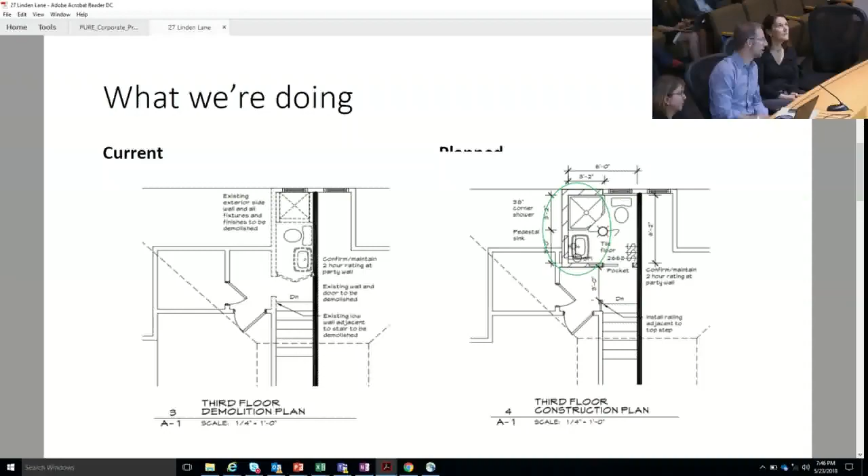What we're doing, as described, the third floor rear dormer is currently about 5 feet wide. It has a non-complying bathroom today that is unusable, a little bit crazy. You have to step over the toilet to enter a shower that doesn't work. That is pre-existing. What we'd like to do is bump the dormer out about 5 feet in order to make enough space to accommodate a shower, a toilet, and a sink on that third floor.

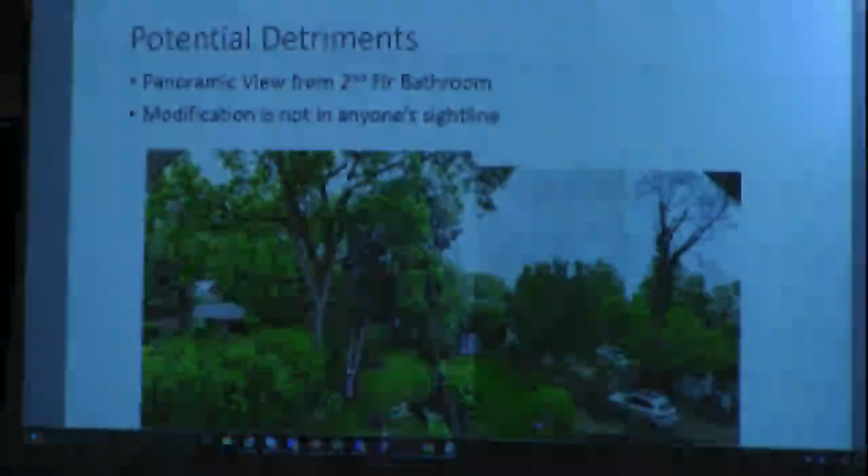There's nobody who sees this space. There's no house that looks at it, not even a back window. So cosmetically, the only person who's going to see that is someone pulling their car in and out of that yellow garage.

So we don't feel like it detracts from the character of the neighborhood or the town. We sent out the required notices. Karen Loomis is our next door neighbor in the duplex, so she's the one most affected by this. I've got the letter here - she's on her way to or in Ireland right now, but she's very aware of what we're doing and supportive of it, as you can see in the letter. I'm happy to provide a copy to anyone who needs it.

In terms of why: it gets rid of kind of a mess of a space. There's nobody using that shower right now. I have 3 teen and 20-something daughters, and let's just say that shower space in this house is at a premium, especially when all the girls are home. So it would make life a lot easier for our family. I'd think other families would benefit too, as young kids grow up to be older kids - having a second bathroom in the house is a big help.

So with that, I appreciate your consideration and would be happy to answer any questions. Mr. Harmon, can you give those slides to the board secretary? We'll call it your Exhibit A1.

Did you say you're in a duplex? It is a duplex, I refer to it as a duplex - it's attached. I don't know whether it's technically a duplex or an attached unit. The lot line runs right down the middle of the house - that's the reason for all the variances. There's a setback required even though the lot line goes right through the center of the house, and that's one of the reasons there's a problem. But it's not an insuperable problem.

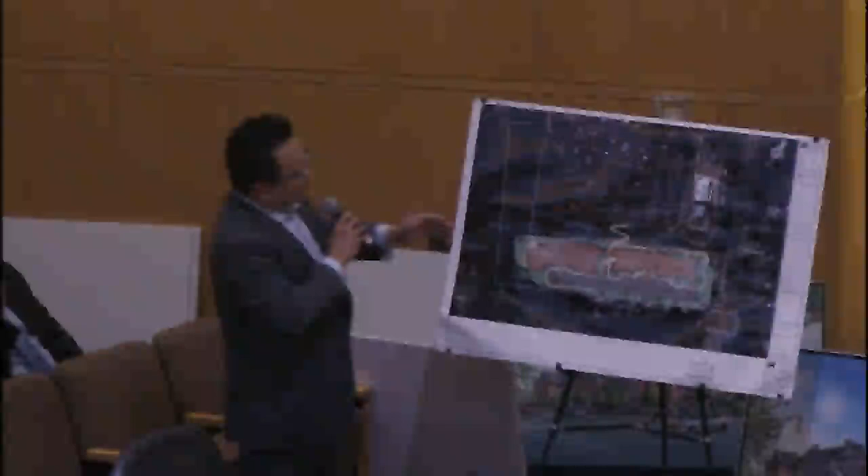Additionally, the setback here against Harrison has been pushed further away, so now the building face is actually parallel to the bank pad. The setback is approximately 58 feet from the property line. Beyond the property line is the right-of-way, which includes the sidewalk as well as curb and such, which is about an extra 10 to 15 feet or so before you get to the road.

So this plan dramatically, or significantly, increases the setback to Harrison and also reduces the height of the building. Furthermore, what's happened here is that we flipped things around a bit, so the parking is in the front in this particular layout. There are different views on whether that's appropriate, having parking in front versus in back. However, a significant benefit is that it creates a much greater separation and allows the building to be set back further from the road, reducing the overall presence.

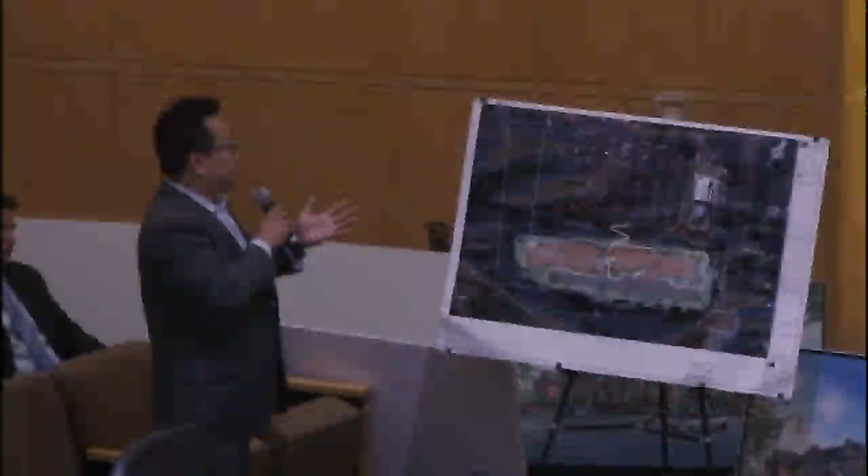So between this option here on board A9 versus the two-story version of the original proposal on board A8, we spent about an hour and a half, almost two hours, with some of the neighbors discussing the pros and cons. Ultimately it was pretty much a unanimous view that they liked what they were seeing here on A9 in terms of the trade-offs.

So what we did is take that feedback on the aspects of the design the public enjoyed and was supportive of, and went back to figure out how we could improve things even further. So what we have to show you next is our attempt to improve this. This is now the new proposed building, and we're going to show you other aspects of it.

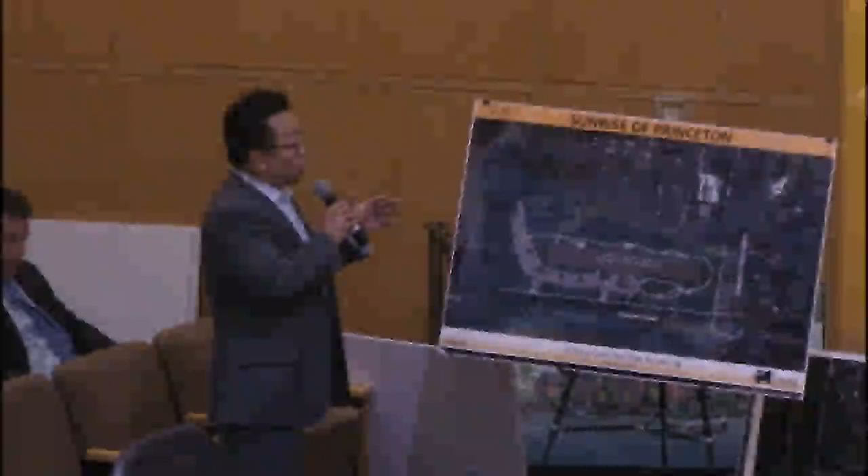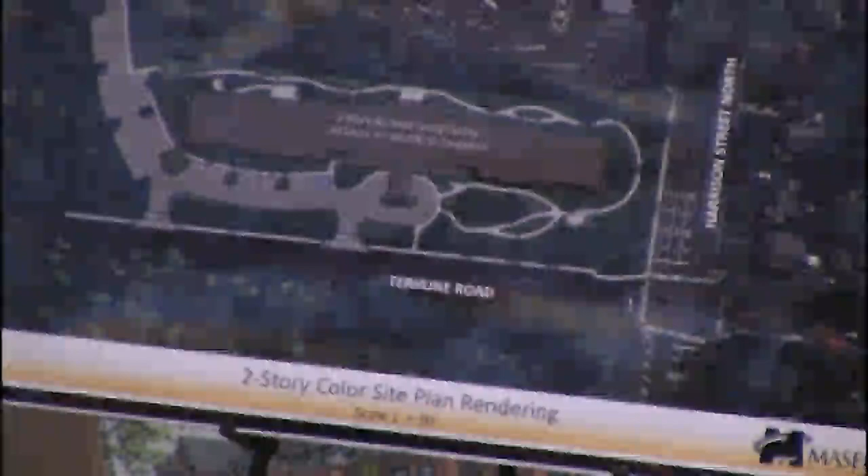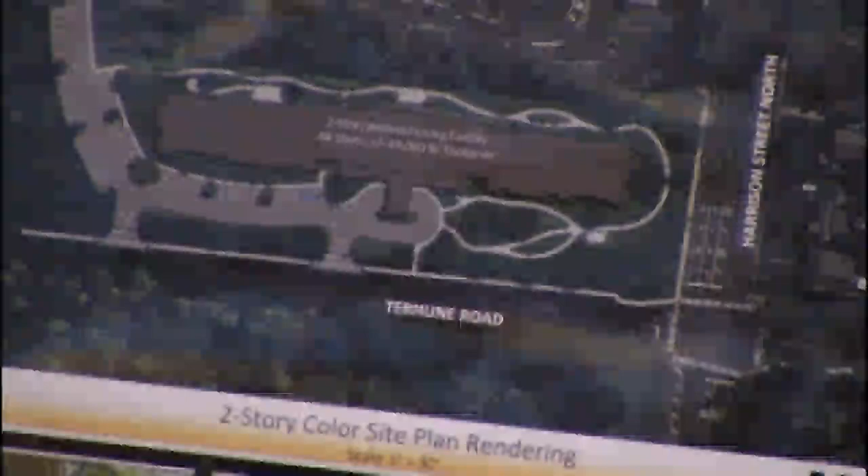So this is Exhibit A10, the new proposed building. Again, this is a bifurcated application, so we're ultimately seeking a zone change, but we recognize a big component of that is a proposed design that generally conforms and helps people get comfortable with the use. Part of showing you these different iterations is to stress that Sunrise is flexible in responding to concerns, and until we get to final site plan approval, things like exact design remain open to further suggestion and evolution.

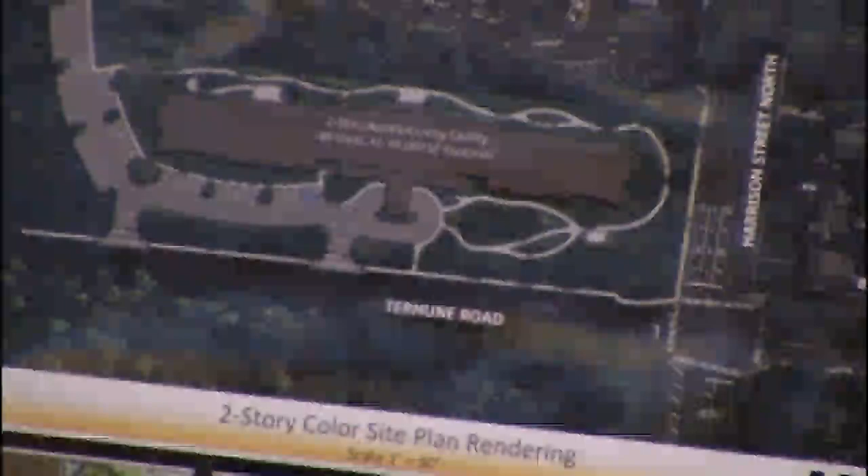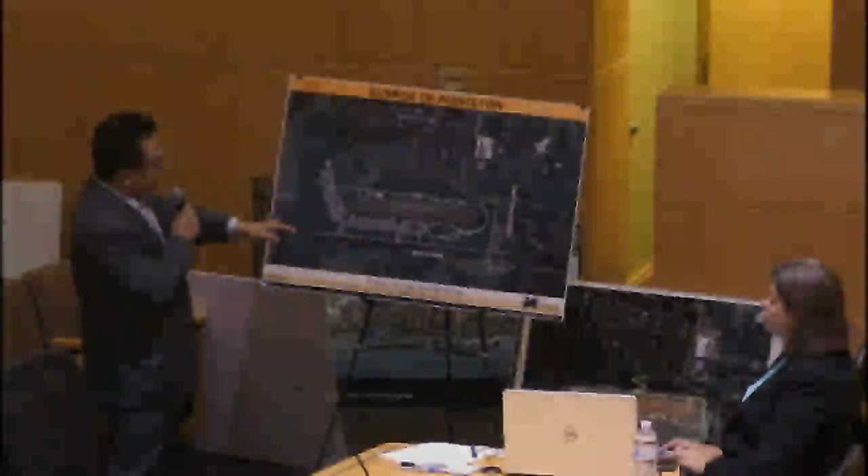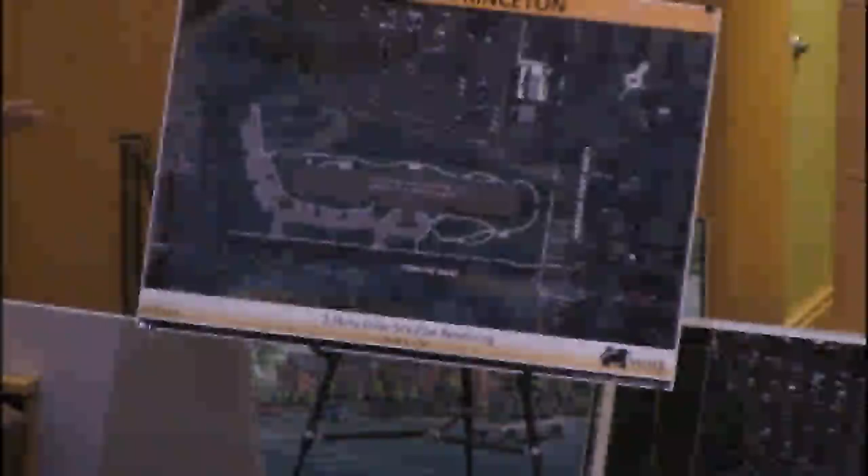I'll touch on a couple things that happened here and why I think this is actually a very reasonable and perhaps desirable plan overall. What we've done is taken the previous plan shown on A9, and rather than split it into two separate buildings, we consolidated it into one. We extended the second floor all the way through. A chief reason is that the physical layout of the site works better for additional parking by merging the building together, allowing us to curve it around to the rear.

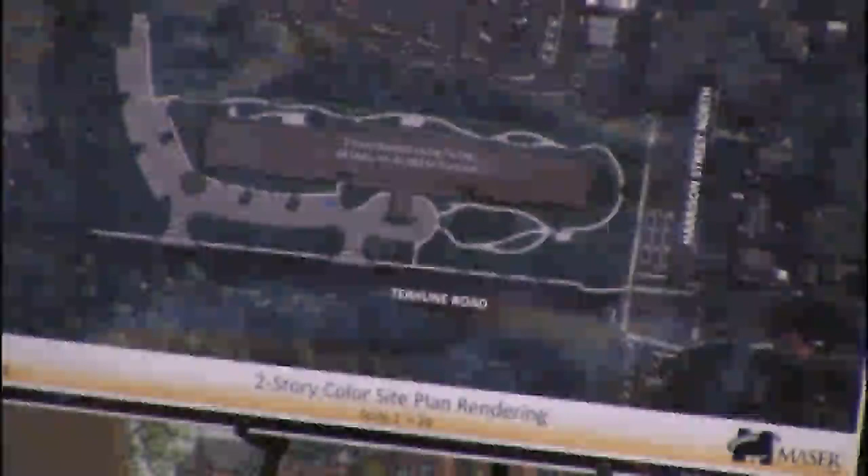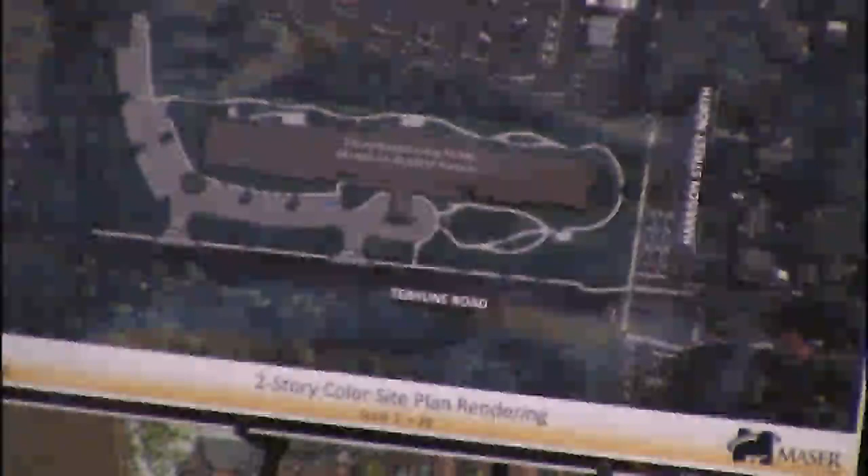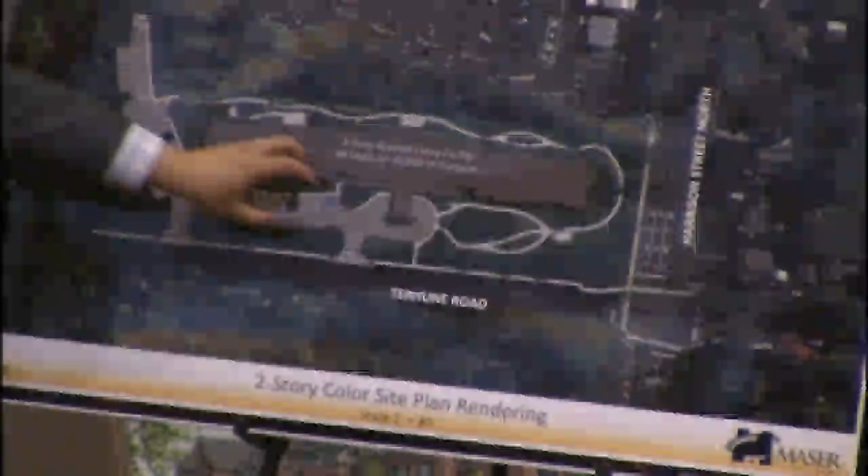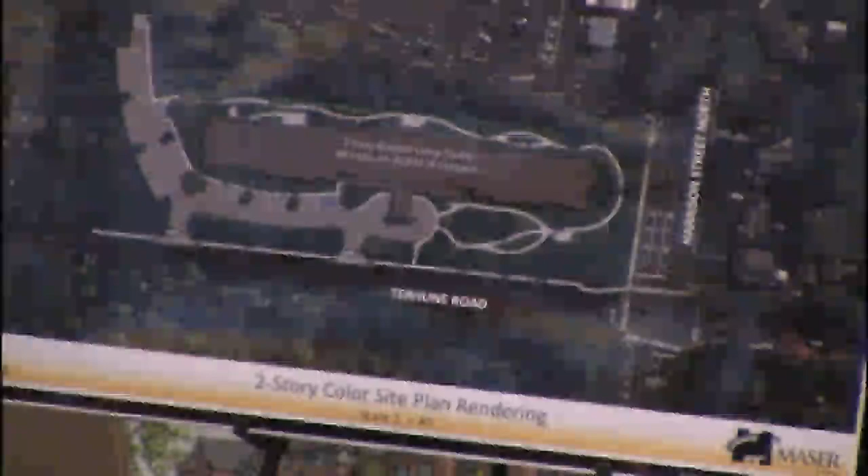One of the major concerns we'd heard from members of staff and council was the desire to move parking away from the front. Knowing how important it is to improve the overall view, visibility, and landscaping of this corner at Harrison and Terhune, we took all the parking and shifted it over, wrapping it around the back side of the building. This allowed us to add 10 extra parking spaces versus the plan shown on A9. Again, one theme raised at last month's meeting was having sufficient parking, and doing it this way gave us the flexibility to add parking, with physical ability to add even more if the board suggests.

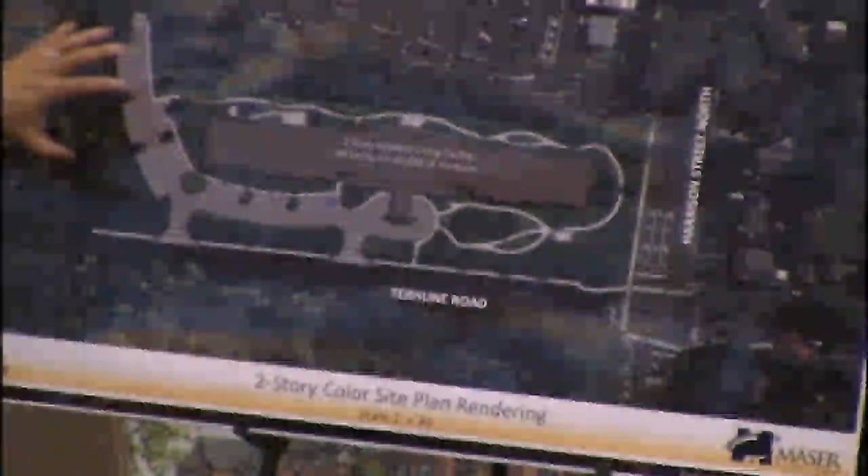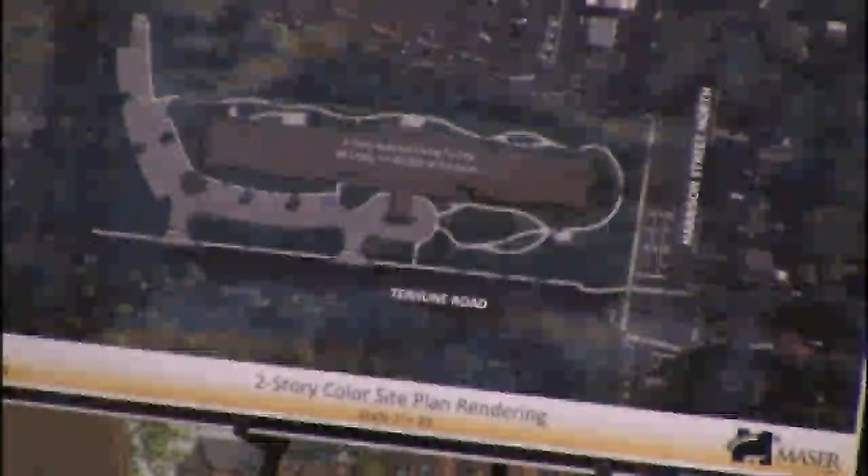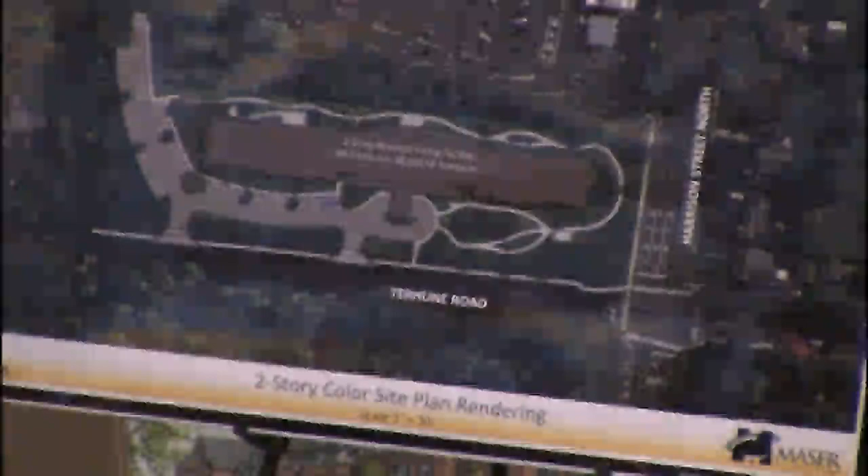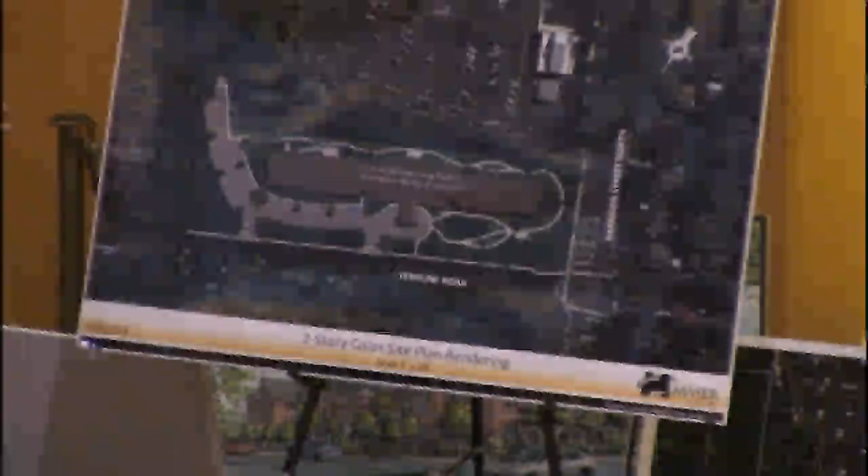Additionally, this ultimately creates a project that responds to the vast majority of concerns raised in the past. This project shown on A10 is smaller and less dense than the original proposal that brought us before you. The physical building has decreased from 89 units down to approximately 84. The physical square footage has decreased from 82,000 to approximately 72,000 square feet. It has gone down from 3 stories to a 2-story building. Because of this alteration of the layout, our engineer will address some of this, but almost all of the various setback variances have been removed as a result. This allows us to maintain the same amount of affordable housing units as in the original project, while dramatically reducing the scale, impacts, and feel of the building versus what we showed a month ago.

Yes, so the Medicaid requirement is 10%, and I believe we're rounding up — 10% of the beds, so we're rounding up to 9.

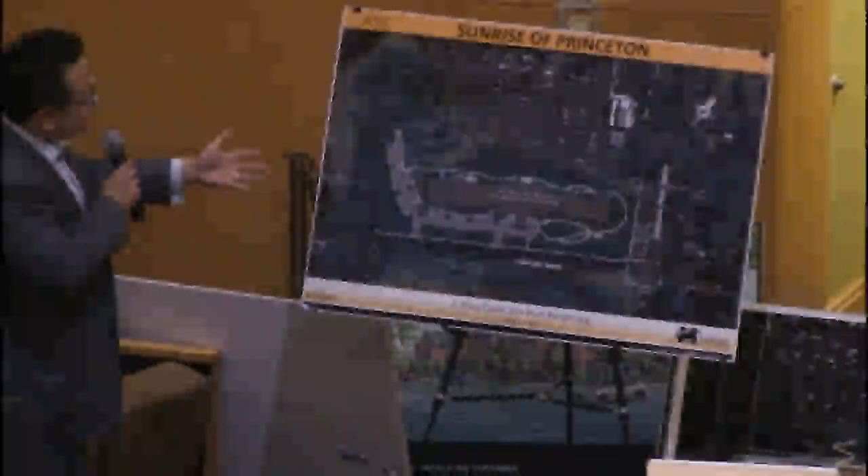That was in the original proposal. We'll round up again to 9 here as well. Again, the plan is not entirely fully fleshed out, but you can see the major directions.

It's improved the amount of walkability. It's improved some of the setback from the rear.

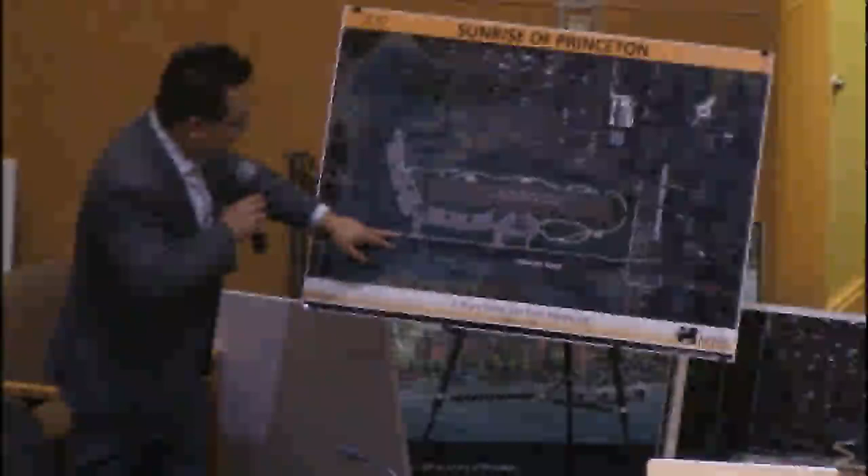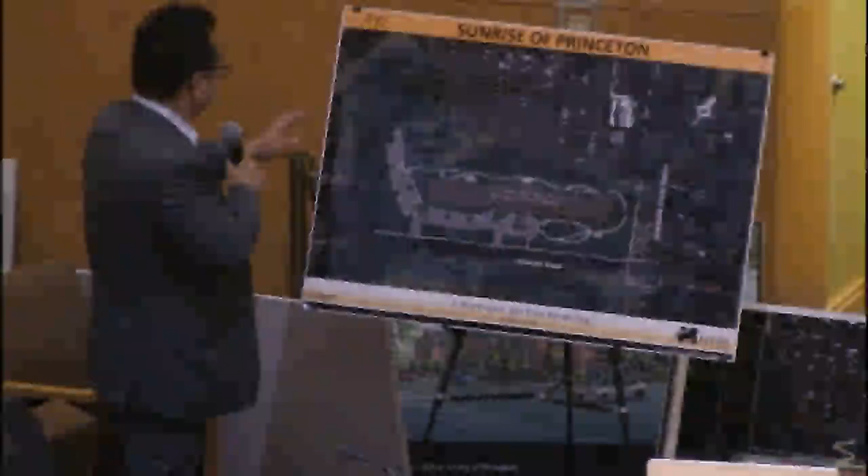The site plan here today also shows the sidewalk improvement that we're adding to the entirety of the Terhune stretch, as well as what's not clearly shown here, and it should be, is that the easement walking path being proposed will be added that runs this length here, allowing pedestrian access from Terhune to the baseball fields and the park to the rear.

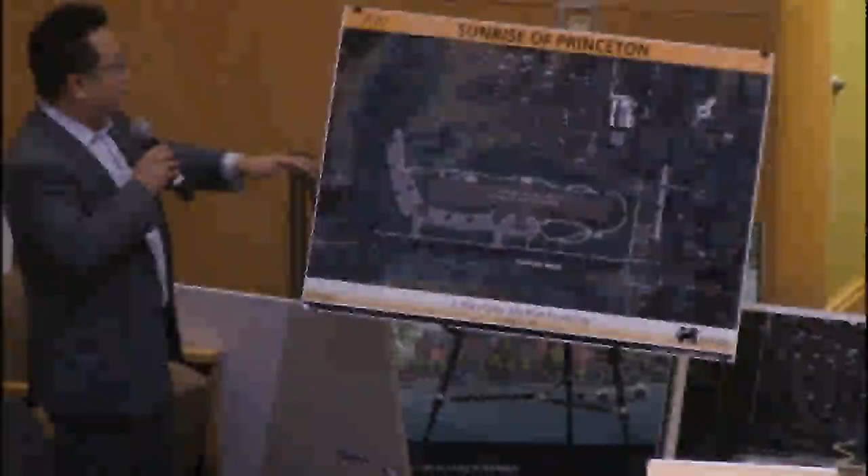Additionally, wrapping around of the parking actually also helps to improve the walkability as well as the safety of usage of this pathway, because it will be physically closer and more visible to other activity as well as light. So it's not just so isolated.

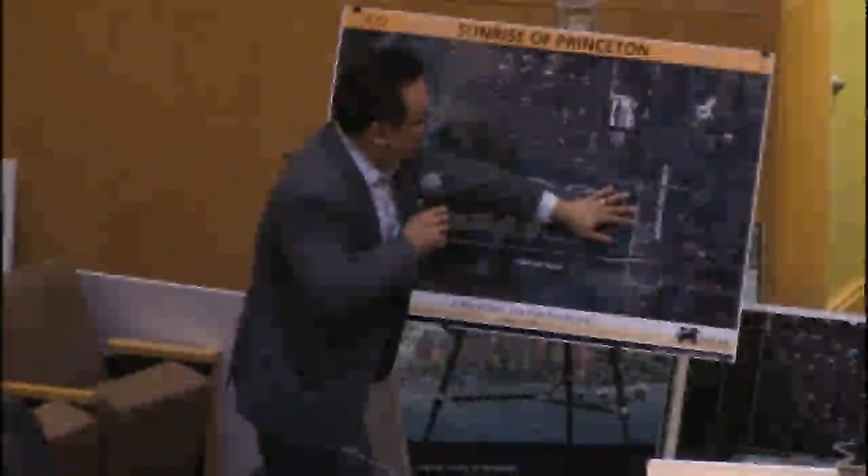And again, similar to as I mentioned before, the setback from here to Harrison has been maintained to the plan that was shown on A9, as well as a dramatic improvement in the landscaping, setbacks, and overall character and look and feel of the frontage along Harrison.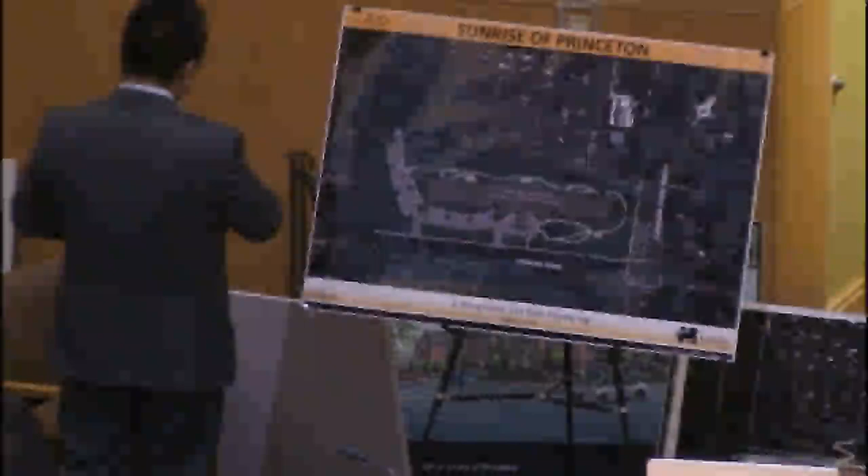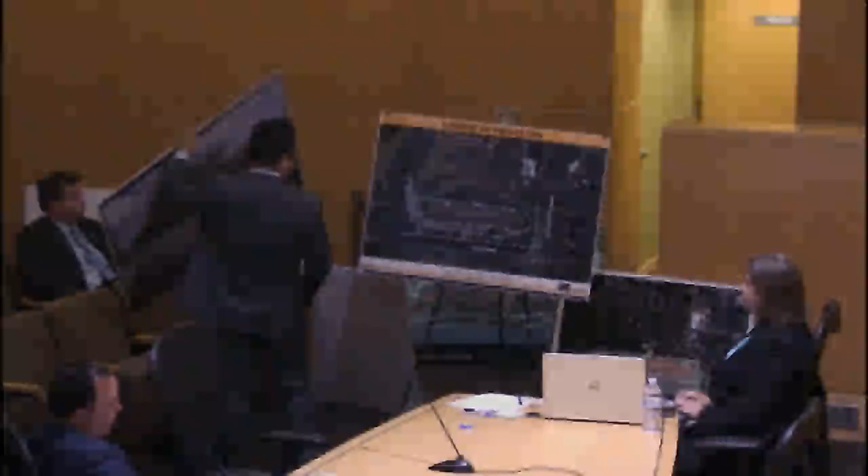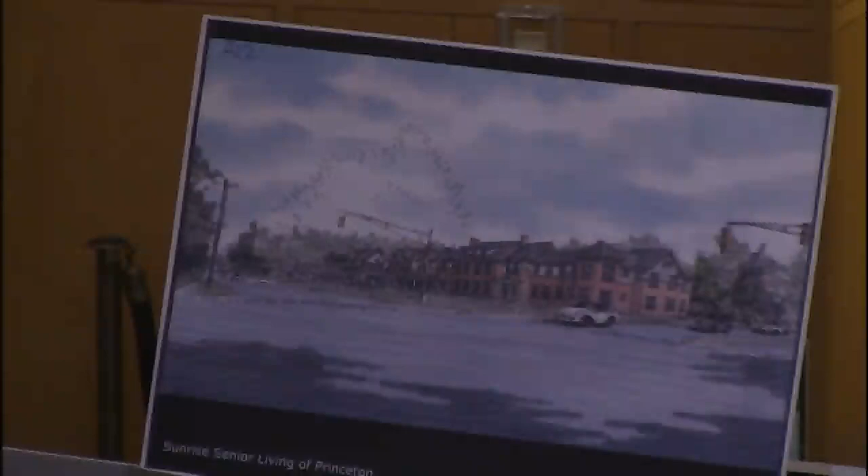So Exhibit A12 is the view of our building from the corner with all of the existing foliage and proposed landscaping removed, just for the benefit of being able to show the building. So this is not the actual view that upon completion you will see, but merely just as a reference point so you can have a better sense of what the building is supposed to look like design-wise.

Just remember that from the angle, it's kind of hard to see the degree of the setback from here because it's from a diagonal. But this gives you a rough sense of stylistically how we're thinking about the building.

But as far as setbacks are concerned, I think you've told us that they're all compliant with the requirements of the law. That's right. In fact, they've been increased beyond that. The setback to Terhune is now almost 10 feet greater than the original proposal we brought before you.

A13. And so this is what the building should look like post-completion because of the landscaping that we are both adding as well as the existing foliage that we are retaining.

So you can see much of the very large existing foliage along Terhune will be preserved, as well as we're going to heavily landscape and be able to screen the Harrison side of the building as well.

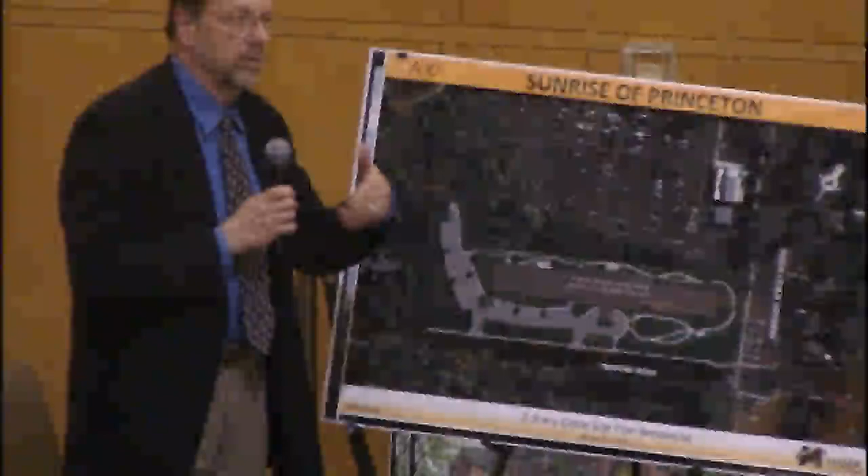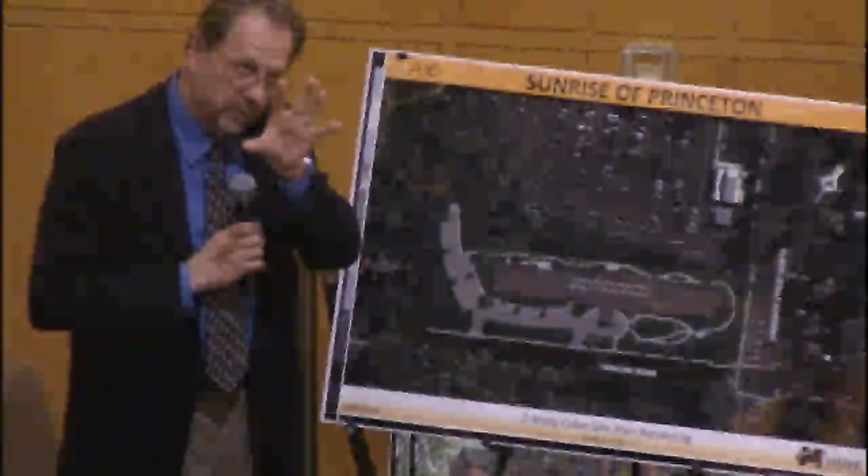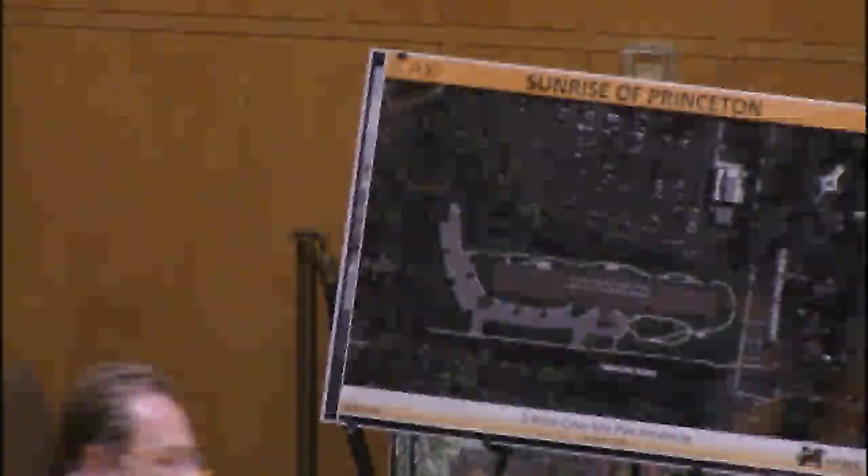I mentioned the material palette a bit. This building, by being very long, the intent with this long footprint is to break the massing down into 3 components. Each component you might refer to as a household. Within each household there will be quite a bit of architectural manipulation, with a strong center component and end components. So it's not just going to be a massive, battleship of an unending roof. There will be a lot of articulation within each household, both in massing and in material choice, so there would be a variety of materials.

We typically use any number of percentages of masonry or stone, along with clapboards, the same type of corner boards and trim, and the same type of detail that one might find in the residential neighborhood. So it definitely will have character, substance, and it will be something very familiar to the neighborhood.

In addition, there are some one-story components. I mentioned the porte cochere before, right in the center of the entry. But both on the rear and the front there would also be a fairly sizable one-story porch, a farmer's porch that wraps around that entire center pavilion, also to help break down the scale and add a bit of semi-public space to the building.

A few other bits and pieces about the construction of the building. Even though this will look very residential in nature, it's still very much built for permanence and safety. These are typically a non-separated mixed use. It's construction type 2A, so it's basically steel and concrete. It's not a wood building, it's a very safe building, fully sprinklered. So even though it will look very similar to residences up and down the street, it really has the life safety protection of a well-built hospital, if you will, but it will look very residential.